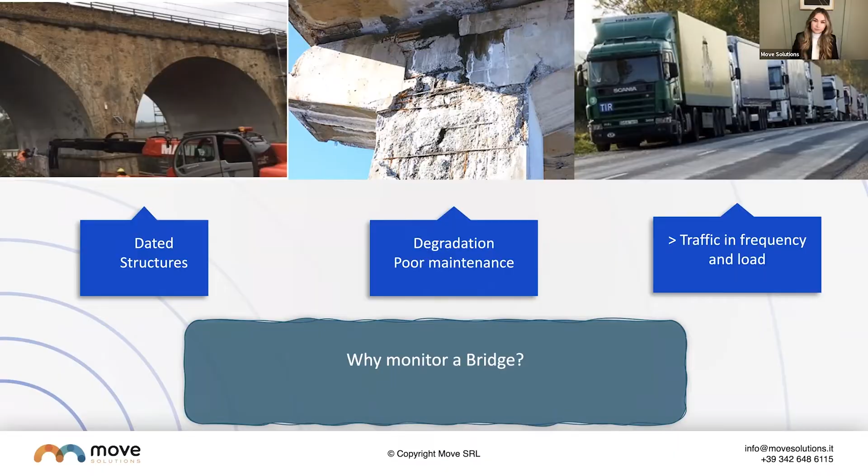So first, why do we want to monitor a bridge? It seems obvious, but maybe we're not sure. As you know, structures are aging, they're getting old, and perhaps you need to monitor the health of that old structure. They're also degrading. There could be poor maintenance on a bridge, it could have a poor rating, and we need to monitor that. We can also monitor the traffic for frequency and load. I think it's important to go over the difference between static and dynamic sensors because a lot of people don't understand the true difference between a static sensor and a dynamic sensor.

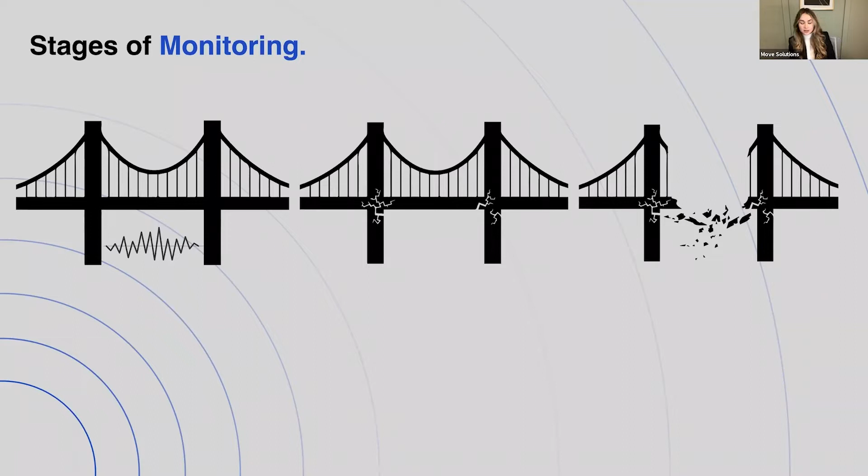So as you can see, the bridge on the right side is a bridge that is collapsing, but there is a visible change. And that is static monitoring. You are installing a sensor and you're watching that bridge. And when that bridge has a change, whatever the change may be, in this case it's a severe change because the bridge has collapsed, that static sensor will show you when that bridge moves. And then you have to work backwards. The bridge in the center, you can see the cracks were forming. So you have to investigate and find out what significant event caused that static change in the bridge that was picked up by the sensors, or perhaps you can see the visible change.

And in the case of the bridge in Pittsburgh, the bridge collapsed, and I believe they're still investigating what actually caused the collapse. Was it the temperature? Did they not perform the testing that they need to? Was it an oversized load? Whatever that may be, you have to investigate to find out what caused that. On the left side, dynamic sensors are actually monitoring the behavior and state of the structure. You're understanding how the structure is performing on an everyday basis and over time, and you're able to understand if something is changing within that structure before there's actually a visible change. So before you pick up that change on a static sensor.

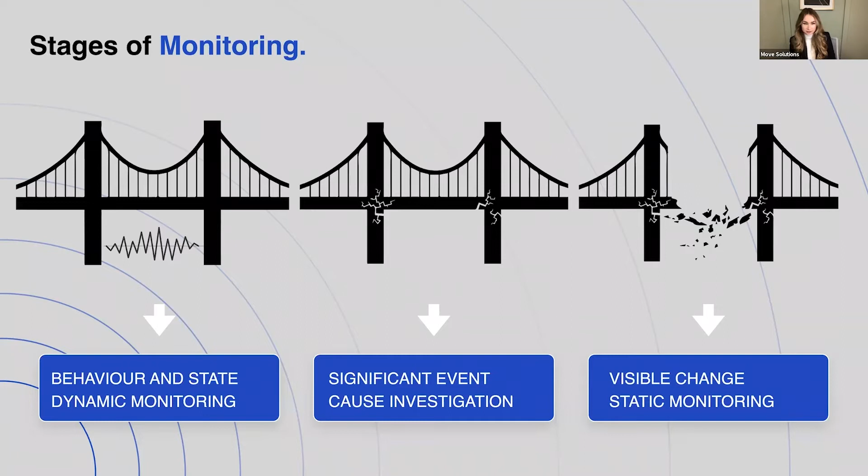And that is the value in Move Solutions. We can take those predictive indicators of the structure and predict the physical change. And then you can prioritize your resources, focus your investigation, and reduce the overall cost, because you can take the corrective action that you need to take before there's that visible change. I'm sure we all know that it is much easier, safer, more cost-effective to fix a bridge rather than rebuilding a bridge after it collapses.

That data is then processed from the gateway to the cloud servers via the cellular communication. Then it is analyzed, processed, and finally displayed on our cloud platform. Finally, the data can be viewed through the appropriate cloud platform provided by us. With the platform, it is possible to manage the entire system remotely and constantly.

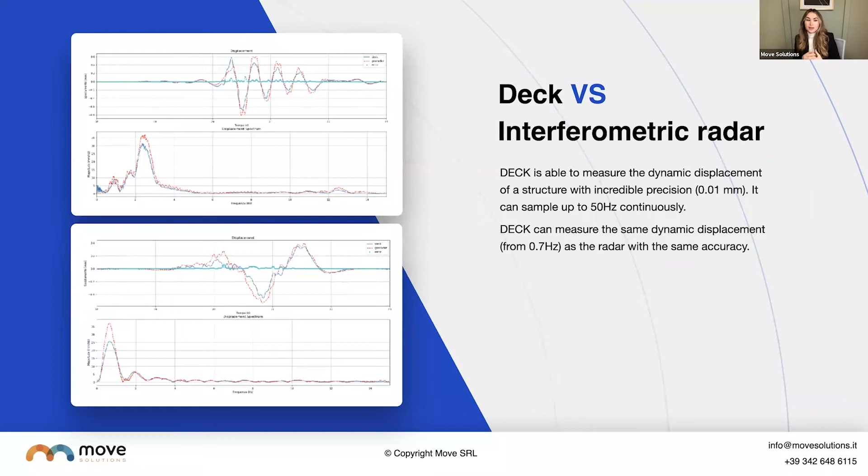Next, we have the accelerometer. So the Move accelerometer can measure the acceleration of the point where it is installed with high resolution. And our accelerometers can actually be perfectly synchronized to each other. So using a group of accelerometers, say at least 4, you can synchronize them together and carry out a modal analysis of the structure.

And finally, we have the vibrometer. So as I mentioned earlier, this isn't typically used for structural health monitoring. This is able to measure the velocity of the point where it is installed, providing a complete analysis of the frequency and amplitude of the vibration. So you can perform a real-time and remote vibrational analysis.

It's a PPV vibrometer, so you can actually set the standards based on the country that you live in to measure the PPV. And this is going to help you understand if the vibrations and stresses caused by construction sites are affecting structures around it.

So perhaps you are doing work on your bridge and you need to know if the vibrations are going to affect the structure of that bridge, or perhaps there's construction next to your bridge and you want to make sure that the vibrations from that construction site are not going to affect your bridge. This is the perfect tool to do so. Once again, it's battery powered, it's wireless, and it's super easy to install.

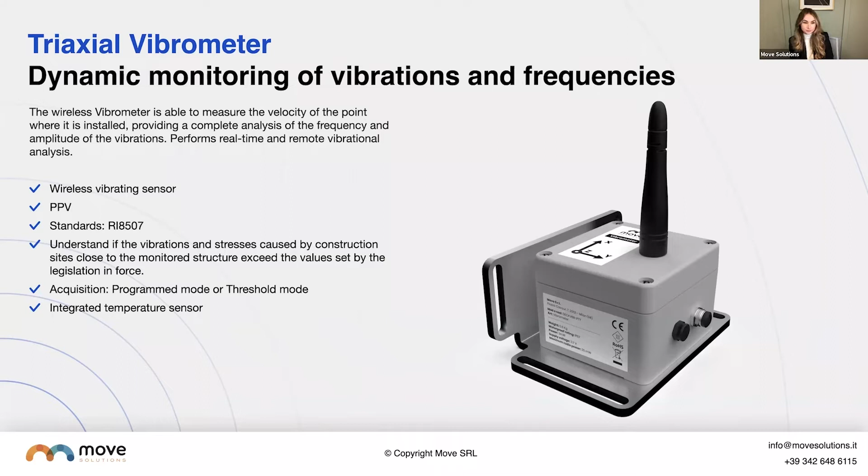Next, we have the analog and digital nodes. So these are a way to connect third-party sensors into the system. So you can use wireless third-party probes. So say crack meters, temperature sensors, strain gauges, whatever it may be, you can integrate it into the system by using the node. So you simply plug the probe into the node, it becomes wireless, and then it communicates through the gateway, and you can get the data on our cloud platform.

The analog node has 4 channels, so it can support up to 4 sensors. And the digital node has 1 Modbus and can support up to 30 sensors.

Finally, we have the gateway. So as I mentioned earlier, this is how the sensors are communicating to the cloud platform. It uses a SIM card. So you simply install a SIM card inside. If you have a bridge that perhaps doesn't have cellular service, but has an Ethernet line, you can simply plug that Ethernet line into the gateway and use it that way.

As I mentioned, it has a watchdog system, so you don't have to try to configure the sensors to your gateway. It will find the sensors automatically. It is constantly looking for them. So say if you have an installation and you want to add more sensors onto the bridge after the fact, it's very easy to do so. You simply install those sensors. It will automatically find that gateway.

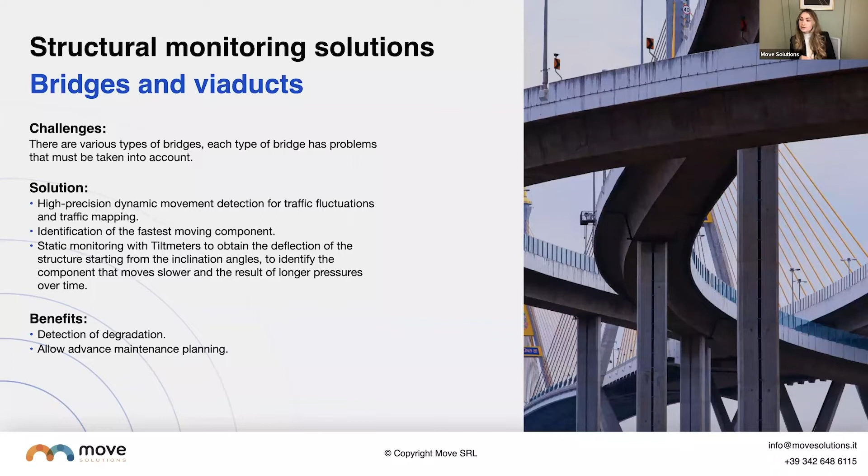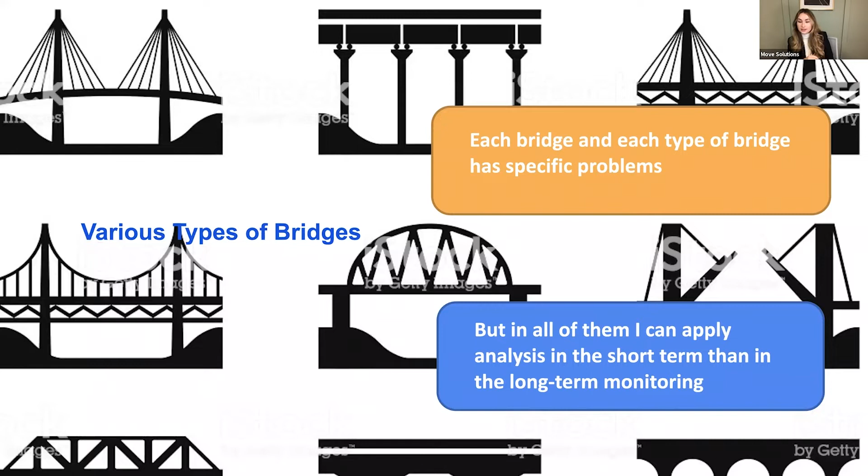And as I mentioned earlier, there are so many types of bridges, and each bridge has its own specific problem. But in all of them, we can apply analysis in the short term and long-term monitoring. So what can I do with Move systems? As I mentioned, we have tools for short-term and for long-term monitoring.

So in the short term, we can perform static load tests and peak analysis and monitor all of the significant parameters of the structure, such as accelerations, dynamic displacements, and rotations. And that gives you the ability to intervene when a certain alarm threshold is exceeded. With the long-term monitoring, you can perform modal analysis, and that's monitoring of modal parameters such as frequencies and modal shapes.

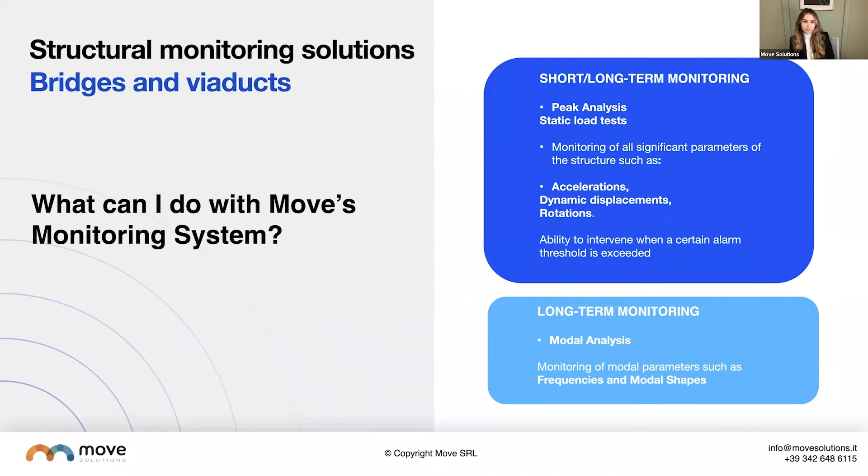So going into the short-term monitoring, one of the tools that we offer you on our dashboard is static load test. So the use of tilt meters, typically at least 4, could be 6, it could be more, allows you to indirectly determine the static deformation and consequently the maximum arrow of the beams of the deck during a load test. It's very easy because you can simply install these sensors. You can use your iPad, you can be at home, it doesn't matter.

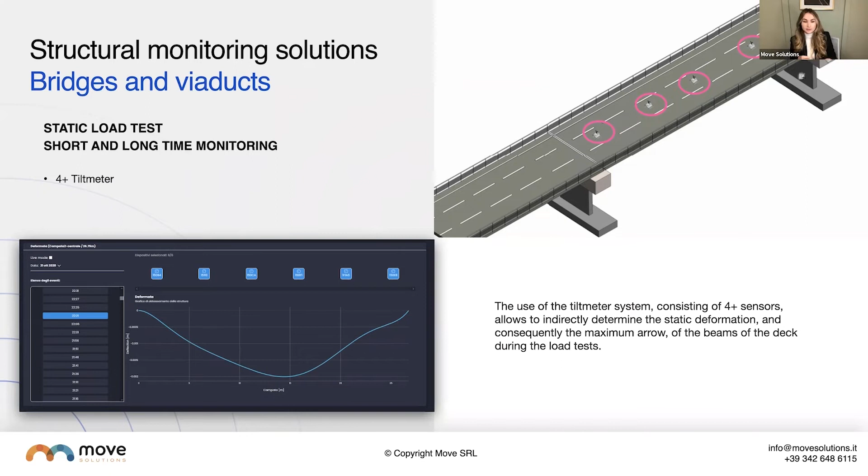And you can see in the bottom left-hand corner, this is what it would look like on the dashboard after performing a load test. And this is a tool that is so easy because typically you would have to take the measurements, use another software, input all of those measurements from the load test that you did, and calculate how it performed. This takes all of that work out of it because it's simply all in one place for you.

The peak analysis in the short-term monitoring. So short-term monitoring records an event when the threshold is surpassed. So you can see on the bottom right-hand corner, those are all of the events. You can set the thresholds on your sensors. So every time there's an event and that threshold is surpassed, it will give you the event set there and also alert you that the threshold has been surpassed. And that gives you an early warning.

And that is what the displacement trend on that graph is showing you, is that peak analysis. You can perform the peak analysis with our accelerometers, tilt meters, decks, and also if you have any third-party sensors, you can integrate those into the nodes. As you can see in the upper right-hand corner, this is what a complete configuration of a bridge would typically look like. You would install those sensors in the center of the span, and then deck sensors on the other spans.

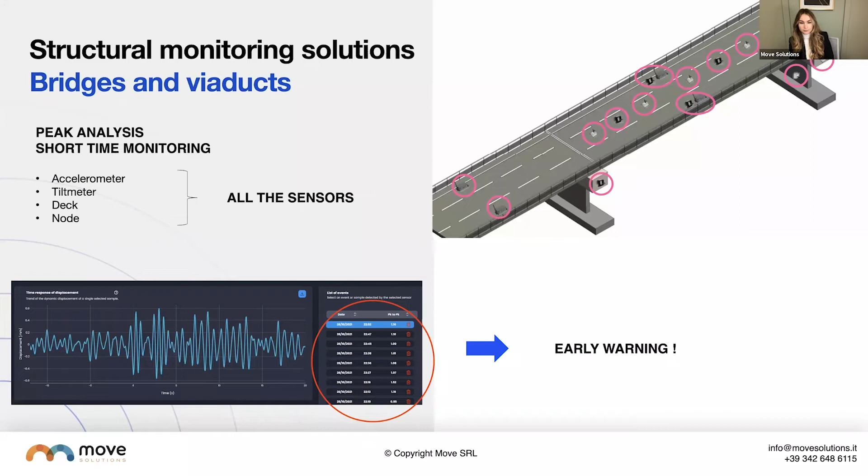What is modal analysis? So getting into the long-term monitoring, I want to talk about what is modal analysis and why is it done? So modal analysis is the study of the dynamic behavior of a structure when it is left free to vibrate. And with modal analysis, it is possible to derive frequencies, modal shapes, and damping. Because they depend on the mass and the stiffness that identifies each structure, you are able to find the identity card of the structure.

We use the modal analysis OMA. So what is OMA? So OMA is Operational Modal Analysis Algorithm. So as you can see, the truck going over that bridge, we do not know the force of the system, which in this case is the truck. But since it excites the main frequencies of the structure in the same way, the result is unaltered using the FDD algorithm and eliminating that white noise. So it doesn't matter if it's a truck or a car or a bus, whatever is passing over is going to excite the main frequencies of the structure the same way.

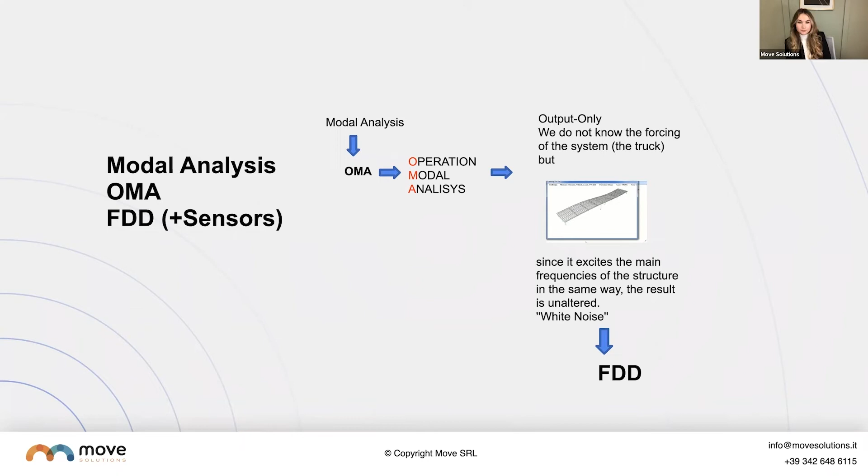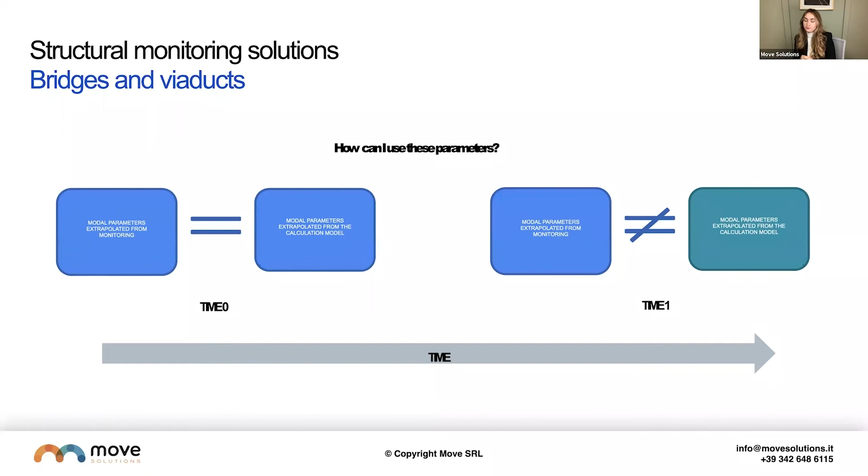And how can I use these parameters? So if the modal parameters extrapolated from monitoring equal the modal parameters extrapolated from the calculation model over time, then you know that there is no problem with the bridge. The bridge is not performing poorly. It is in good condition. There's no change in the bridge. But if the parameters extrapolated from monitoring don't equal the parameters extrapolated from the calculation model over time, then that's when you know that there's something changing within that bridge. And that's when you want to take the action.

Here is another example of a complete configuration of bridge monitoring. So in this case, the deck sensors and the accelerometers are installed in the center of the span. And what those can do is detect the amplitude of the vertical dynamic oscillation, the maximum acceleration on 3 axes, the modal frequency, and the temperature. And by using 6 tilt meters, you are able to understand the angular variation, the bending in the load test of the bridge, or the estimated flexion during normal bridge operation.

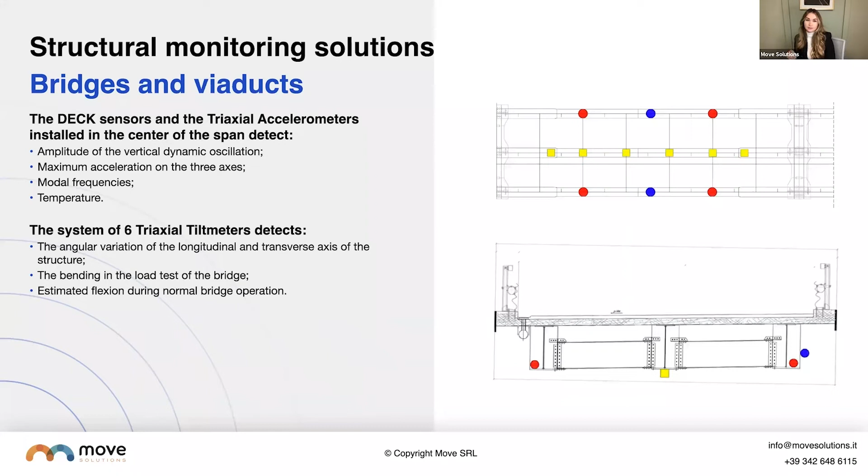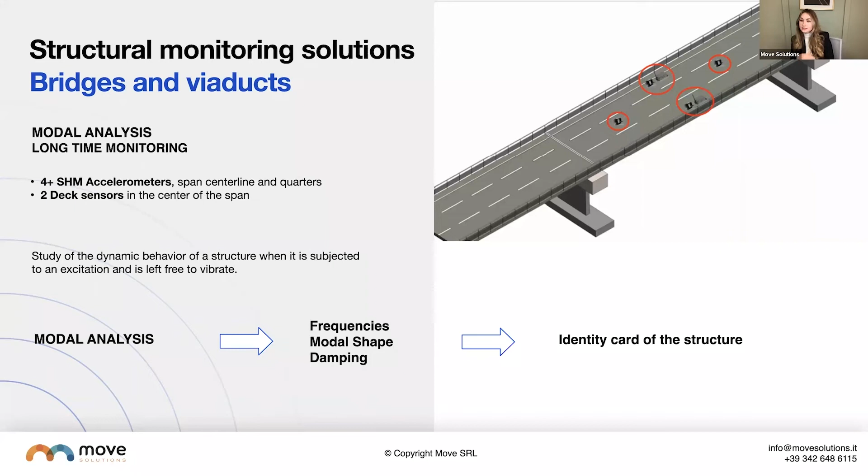Here is an example of modal analysis, which is the long-term monitoring. So in this case, we used 4 accelerometers in the center and 2 deck sensors in the center of the span. And this is the study of the dynamic behavior of the structure. So you can use the modal analysis to understand the frequencies, modal shape, and damping, and get the identity card of that structure.

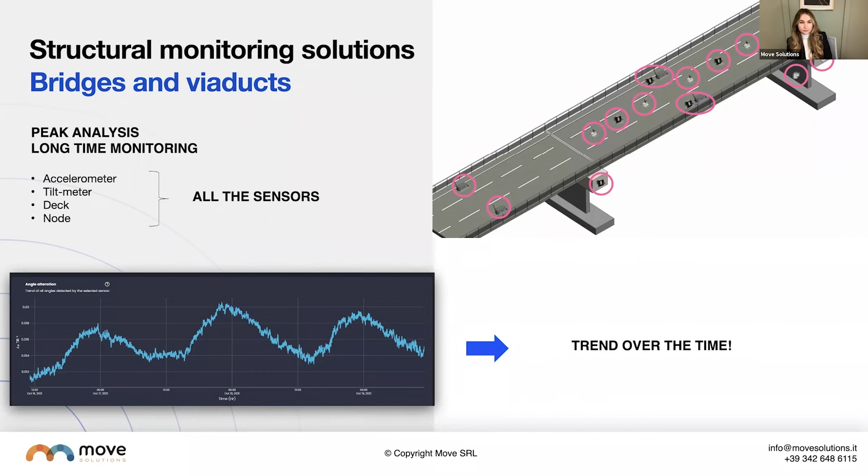Here is what the dynamic displacement trend looks like on our cloud platform as well. This trend is very important because it tells us how the structure is reacting over time. Its non-constant trend over time may mean that the above loads have increased or decreased, or that there's a change in the structural parameters and that structure is responding poorly.

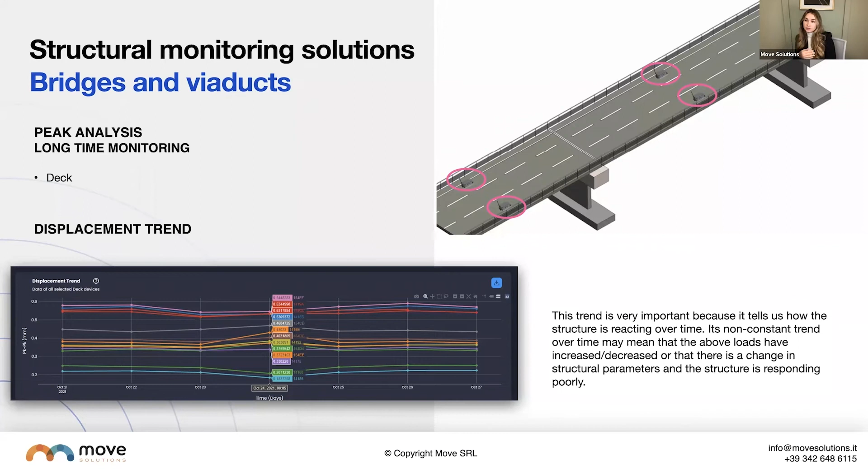So why is it important to do both dynamic and static monitoring? I know we've touched on this before, but dynamic monitoring gives you the dynamic identification of the structure. So that is the frequencies, the shapes, the damping, and the identity card of the structure. And that depends on the geometric parameters of the structure. And that'll give you the variation of geometrical parameters.

So perhaps there's cracks, there's settlements, inclinations of the structure leading to a variation of the parameters. And that is going to show you that before it picks it up on the static monitoring, and understanding the cause of why that bridge is degrading. Why are there cracks forming? Why is it settling?

The MoveCloud platform offers multiple types of raw data visualization, but above all, it offers specific tools designed to monitor your structure. So as I mentioned, we have tools for static load tests and multiple algorithms to understand the data that you are getting from the sensors. We're not just giving you the raw data and then you have to try to figure out what's happening. We're making it as easy as possible with our cloud platform.

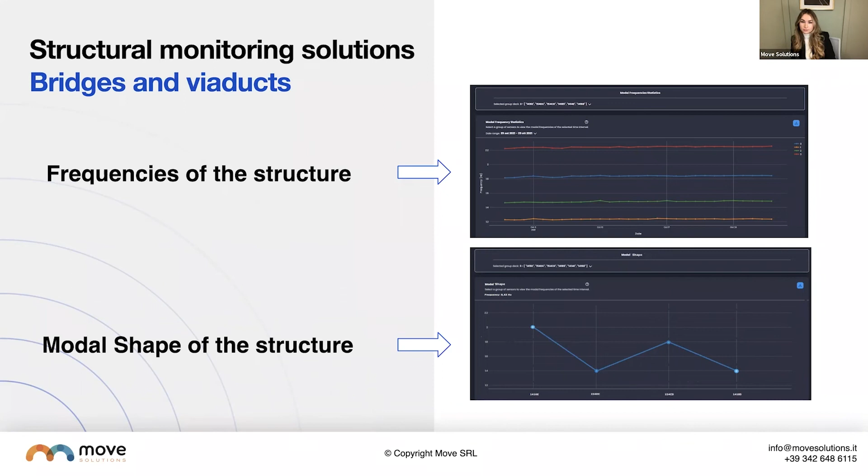Using our dashboard, user experience is essential to Move Solutions. So this is why it has been specifically designed to help understand the data and keep it simple and intuitive. As I mentioned, it's possible to customize and manage the display of the installed sensors, upload your photographs. You could put technical drawings in there. You can also extrapolate the raw data as well.

So it is possible to access and analyze all of the historical data detected by the sensors, compare and correlate them with each other. Through the analysis of the raw data, it is possible to understand the trend of the state of health over time of the monitored structure.

And as I mentioned, there's tools for every type of structure. So we don't just do bridge monitoring, there's tools for many types of structures. So perhaps you have a rail track over a bridge. You can install the sensors and use the tools for both the rail and the bridge.

Here is what it looks like using the vibrometer. So I haven't talked a lot about the vibrometer since I first mentioned it. But as you can see on this chart, you can actually set a threshold with the vibrometer. So with the use of vibrometers, both in the sites under construction and in neighboring buildings, it's possible to monitor how the structure reacts to these stresses and whether or not they are harmful to it and users who use it. So if you look at the scatter plot, say if you're using one of the standards, the USA standard or a European standard, you can set that standard right into that scatter plot.

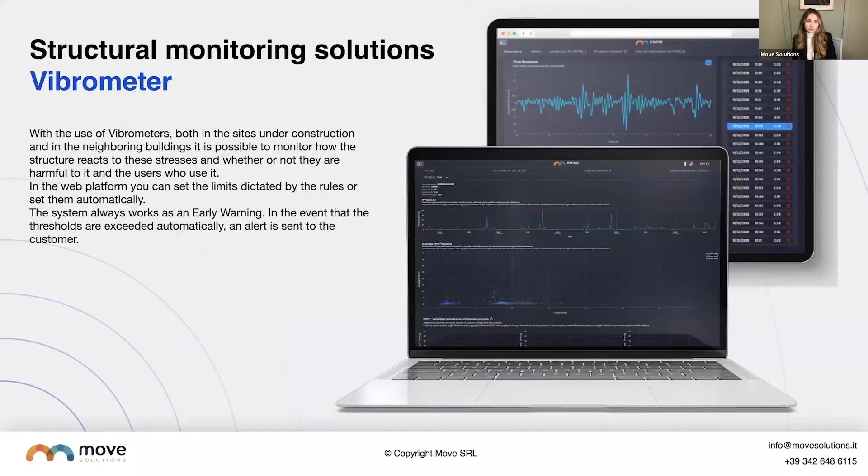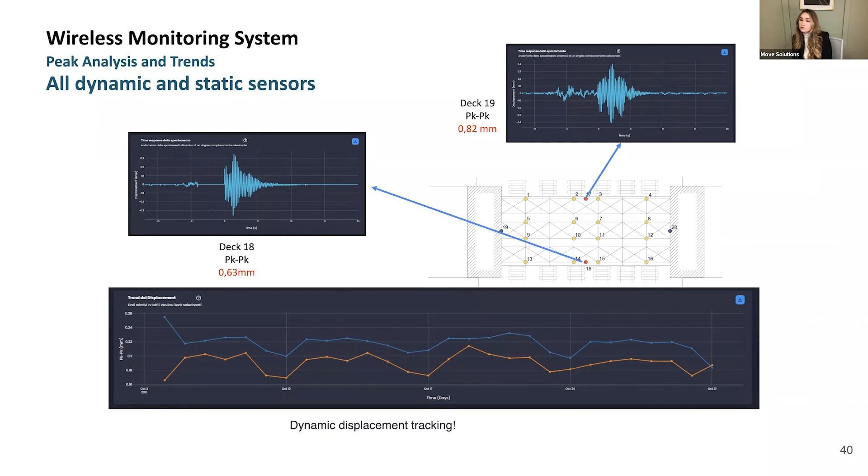Looking at the two types of analysis in detail from this installation, for example, the decks installed in the center of the span allow you to directly monitor the dynamic oscillation of the deck in millimeters. Any event that exceeds a certain threshold set by the user is logged. And every day, all of these events are taken, and in the platform, this trend is displayed, significant of how the structure reacts to traffic. This analysis can be done not only for dynamic sensors, but also for all of the sensors.